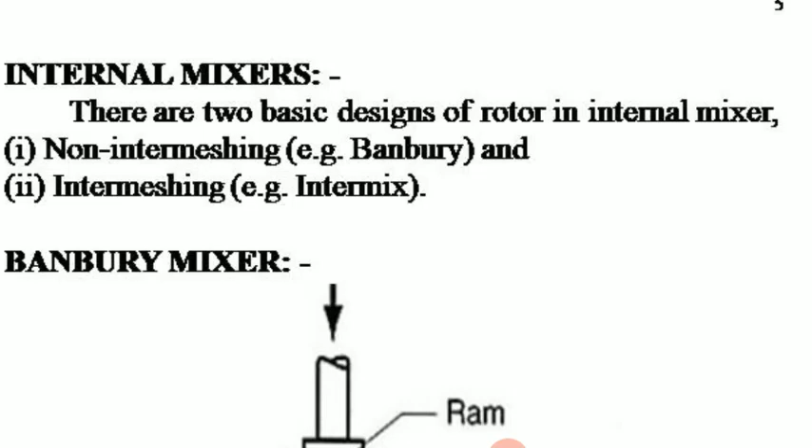First we shall see the Banbury mixer, that is the construction of this Banbury mixer. The Banbury mixer consists of a ram and a hopper. This is the hopper through which the material is fed into the internal chamber, and it consists of channels for cooling. This is the channel for cooling, and a rotor. This rotor is non-intermeshing type, and after mixing is over, the material is discharged through this discharge door.

The construction looks very simple: it consists of a ram, hopper, a casing, rotor and a discharge door. Everything is enclosed in a chamber, which has channels for cooling.

So the Banbury mixer consists of a completely enclosed mixing chamber in which two spiral shaped rotors are rotated. These are the spiral shaped rotors. They will not touch with each other, so it is called non-intermeshing. If both touch each other like a two-roll mill, then they are intermeshing. Here it is non-intermeshing.

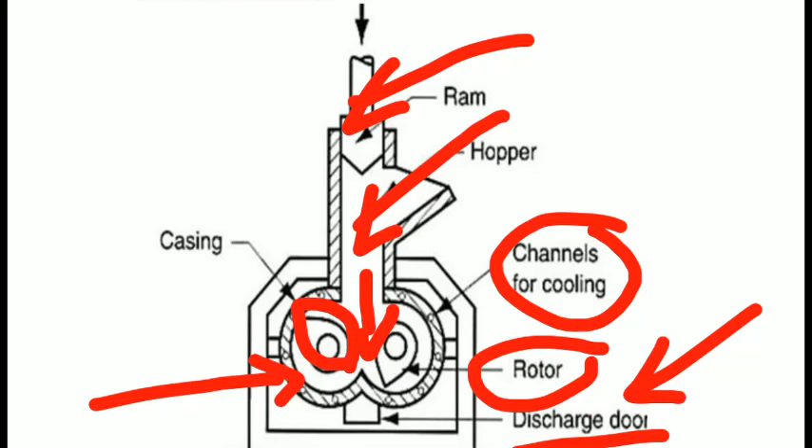The hopper at the top receives the compounding ingredients, which are fed from this hopper. A door at the bottom discharges the mixed batch of the compound, and the rotors are driven by electric motors.

The pressure is applied in the form of top pressure by a plunger, using this ram. The hollow rotors and double wall chambers are used to provide cooling and heating. These are the channels for cooling and heating.

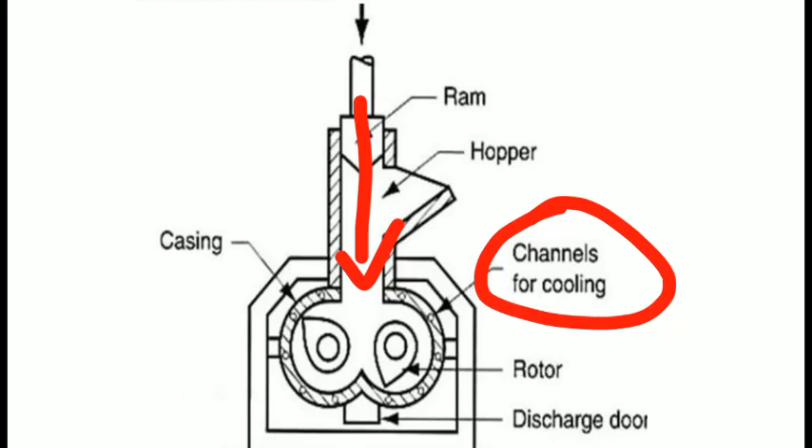Now we shall see the operation of this Banbury mixer. First, the ram is raised, up to this point, and the material is mixed or first loaded via the throat.

Now we shall discuss the mixing operation of the Banbury mixer. First, the ram is moved upward, and the material to be mixed is loaded via this throat.

When mixing, the ram is lowered and sits on top of the rolling bank. Here there will be a rolling bank, where the material mixes. The ram is usually operated pneumatically. The load applied to the rolling bank can be varied by altering the pressure applied here.

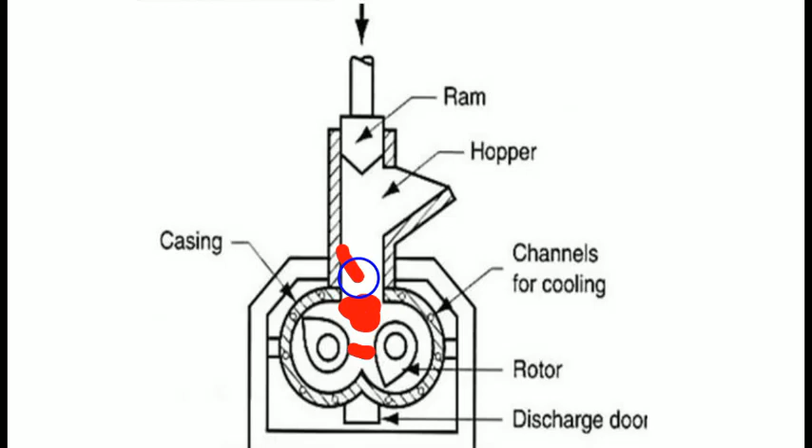When mixing the compound, shearing takes place in the following areas: between the rotors, in the rolling bank where the ram sits, and between the rotor and the chamber wall. So these are the three areas in which shearing can take place.

First, between the rotors, a certain amount of shear is applied to the compound by rotating the rotors in opposite directions and at different speeds. In the rolling bank, the compound is sheared between the rotor and the ram. The third area is between the rotor and the chamber wall, so when the compound is returned to the rolling bank after exiting the nip, the shearing action takes place between the rotor and the chamber wall.

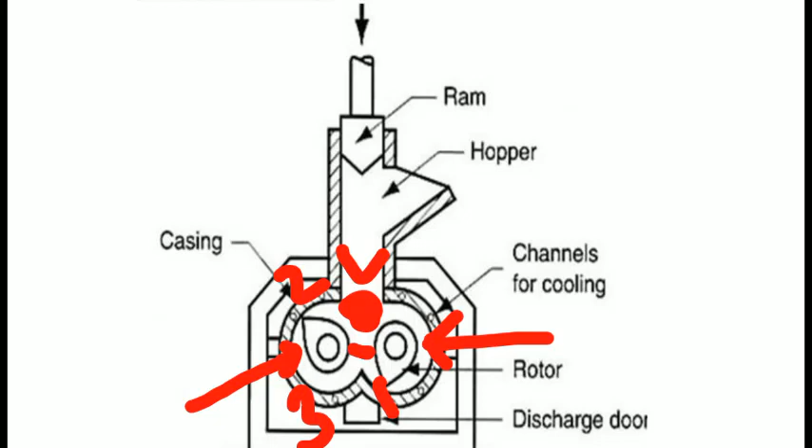The major amount of shearing takes place in this area, between the rotor and the chamber wall. So during processing, the level of shear imposed on the compound is controlled by varying the rotor speed and the ram pressure.

Water or steam is usually circulated through the hollow rotor and the chamber to provide cooling or heating.

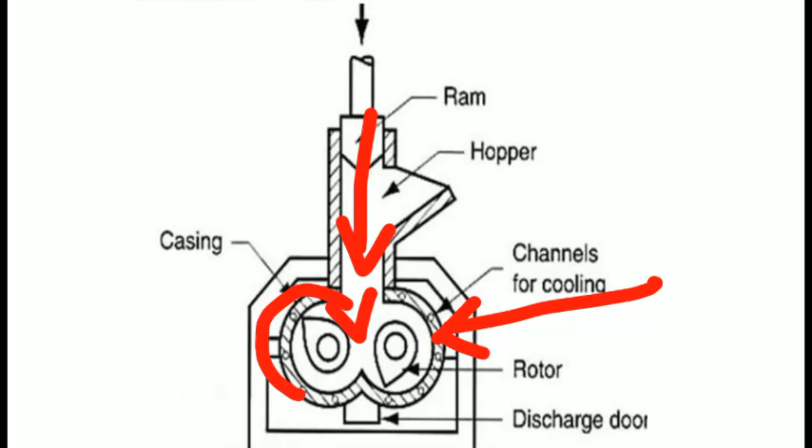The mixing process inside the internal mixer requires the correct volume of material to be loaded. If the batch size is too large, unmixed material will remain at the base or feet of the throat at the end of the mixing cycle, so proper mixing will not take place.

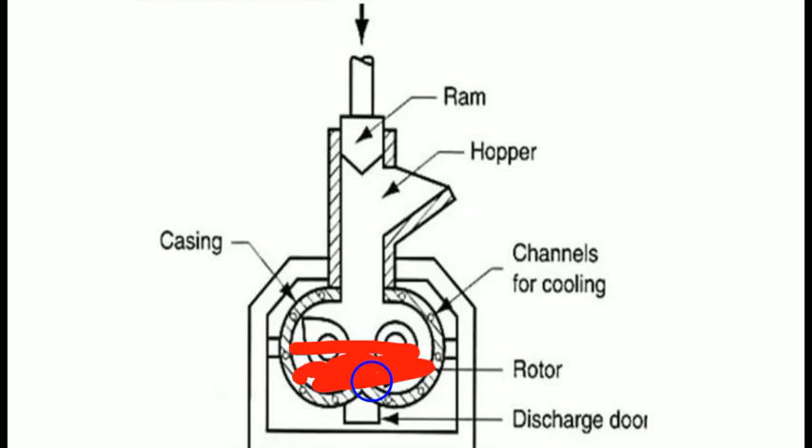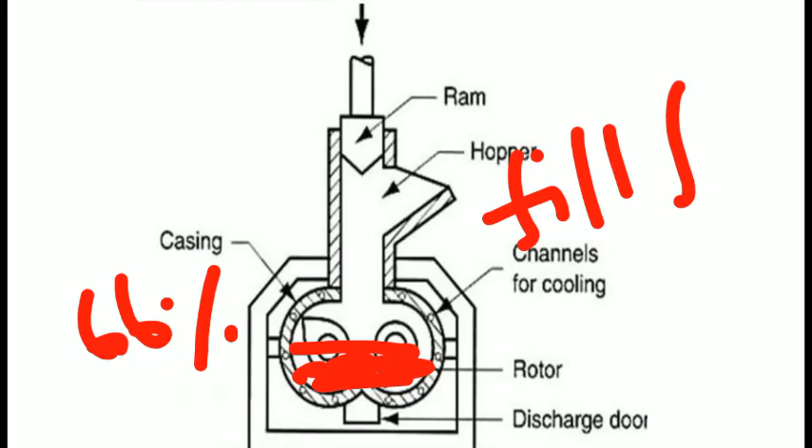Also, if the batch size is too small, the mixing will be insufficient and slow. So the volume of the batch is usually 66%. This is called the fill factor.

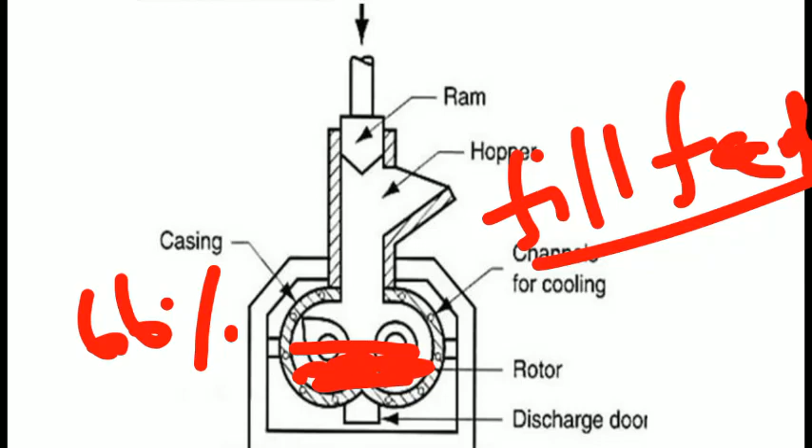So what is fill factor? Fill factor is nothing but the ratio of volume of the batch to the volume of the chamber or mixer.

Now we shall see the advantages of the Banbury mixer. In Banbury mixer, more uniform compounds and a large batch can generally be prepared by this internal mixer. In a two-roll mill, we can prepare only up to about 15 to 20 kgs, but here we can prepare up to 100 kg or 150 kg.

It is also free from dust, especially during the preparation of filler based compounds. For example, carbon black, silica or other particulate fillers, when added, will not form dust. So a dust free environment will be there. This is the second advantage.

The third advantage is that the chance of accident is less, because it contains an enclosed mixing chamber. So the advantages are: large batch can be made, and it is dust free and accident free. But it has some limitations also. It is very difficult to clean the internal mixer thoroughly, like a two-roll mill. So this is the only disadvantage.